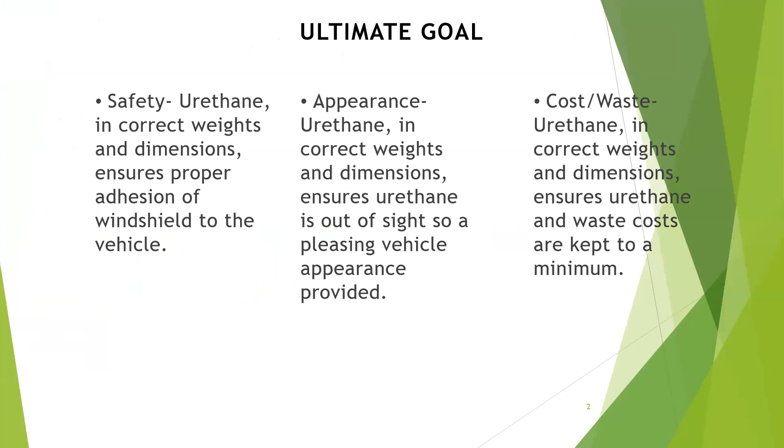For the first part, the ultimate goal has three aspects. First, using correct weights and dimensions to ensure proper adhesion of the windshield to the vehicle. Second, using correct weights and dimensions to ensure a pleasing vehicle appearance. Third, using correct weights and dimensions to ensure cost and waste are kept to a minimum.

The current situation is an increase in incidents reported by team members, and the persistent excessive use of adhesive is causing problems in Plant 2.

Over the past 7 month period, the current specifications for urethane weight are 0.9 to 1 kilogram per car for the Venza, and 0.7 to 0.8 kilogram for the Camry and Avalon.

The proper bead shape forms an isosceles triangle with nominal dimensions: 8 millimeters wide at the base and 12 millimeters in height.

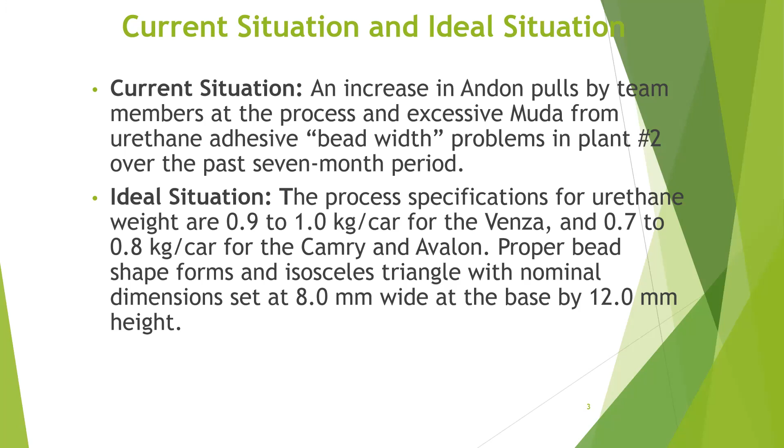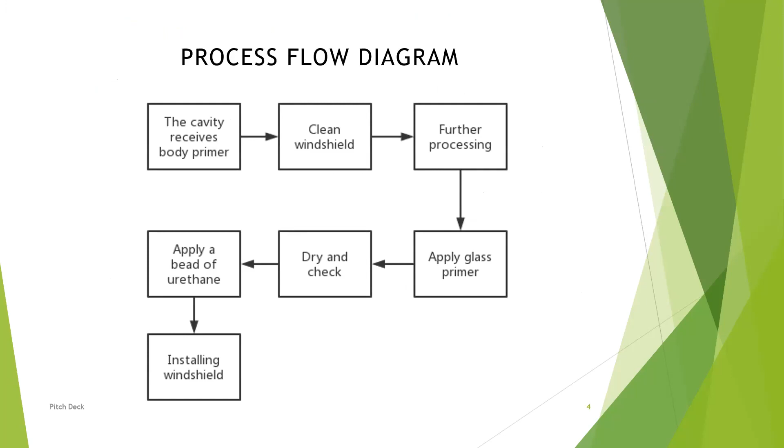Here is the process. First is the cavity with body primer, clean the windshield for further processing, apply glass primer, dry and check, and apply a bead of urethane.

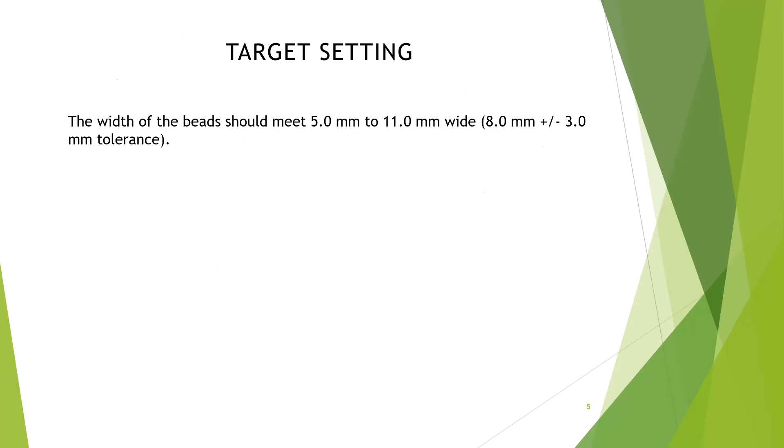Last is installing the windshield. The target setting is the width of the bead should meet 5 millimeters to 11 millimeters wide. So here is a fishbone diagram.

There are 4 root cause aspects. First is man: the root cause is the robot cleaning procedure is not clear, and new employees don't know to clean, incomplete training. For method, the root cause is too large a tip cleaning tool used, pump pressure too high, incorrect temperature, inadequate cure time.

For material, the root cause is incorrect viscosity, shelf life exceeded, excessive waste, and excessive use. For machine, the root cause is unstable pump pressure, pump wear, and unstable robot speed.

These 4 root causes combine to cause bead width changes together.

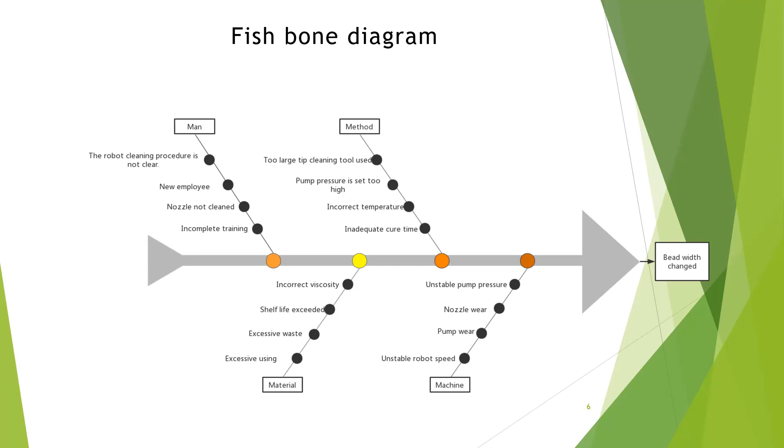Here is the 5 whys. The first question is why is the pump pressure unstable? It's because the dispense tip is too wide or clogged, and the viscosity of urethane is too low or too high.

Second question is why did the employee training fail to achieve the expected results? It's because the purpose of training is not clear and there are no strict training standards.

The third question is why is the temperature unstable? It's because the environment temperature changes and the cooling equipment fails.

Why is the speed of the robot unstable? It's because the robot cleaning procedure is not clear, and the robot speed is not adjusted.

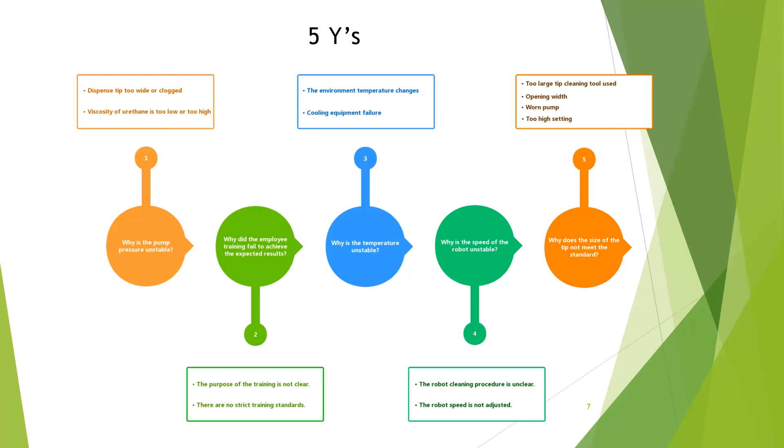Why does the size of the tip not meet the standard? It's because too large a tip cleaning tool is used and the opening widths are set too high.

Here is the affinity diagram. I organized it into 3 sections. The first section is training and employee.

We should provide professional training for employees with a training outline and practice, and training must have tests and produce staff operating guidelines. For the equipment section,

I think performing regular maintenance on the equipment is needed, and equipping it with temperature monitoring equipment and viscosity of urethane monitoring equipment.

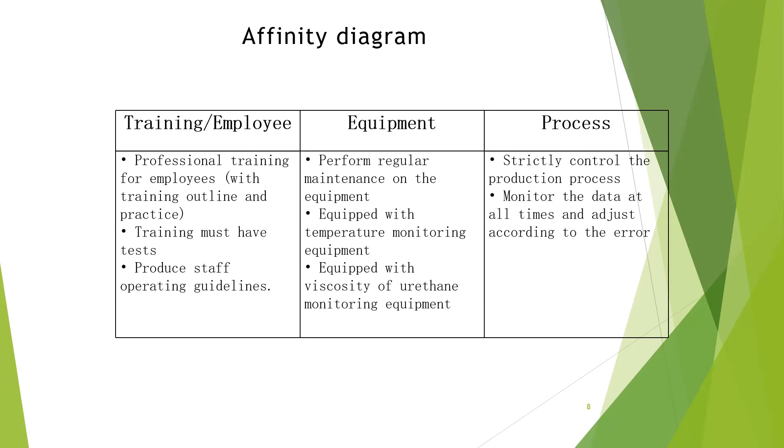For the process, I think we should strictly control the production process and monitor the data at all times, adjusting according to the error.

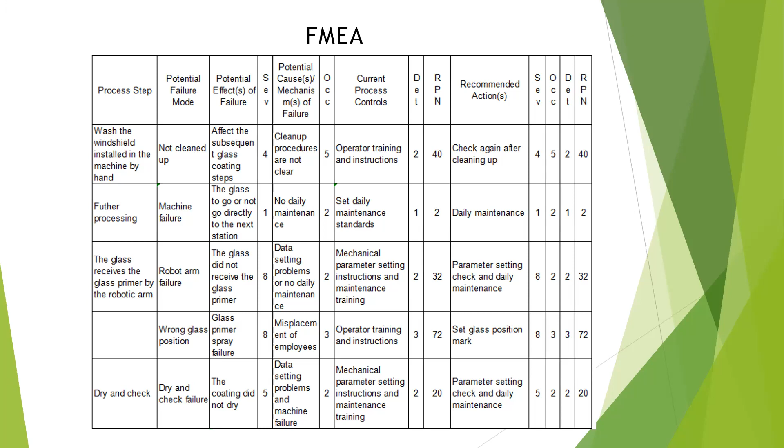Recommended actions are parameter setting checks and maintenance. The last two steps are glass receiving the bead of urethane by the robot arm.

It has two potential failure modes: the bead width is too wide or too narrow. The effect can be windshield replacement needed or cleaning to remove urethane.

The cause can be robot speed, dispense tip too wide or clogged, urethane viscosity, or pump pressure.

We can control it by operator training and instructions, mechanical parameter setting instructions, and maintenance training. We can also buy new equipment, like a new pump. The recommended actions are parameter setting check, daily maintenance, and new equipment.

For the robot arm failure, the effect can be that the glass didn't receive the bead of urethane. The cause can be data setting problems or no daily maintenance. The control method is mechanical parameter setting instructions and maintenance training. Recommended actions are parameter setting check and daily maintenance.

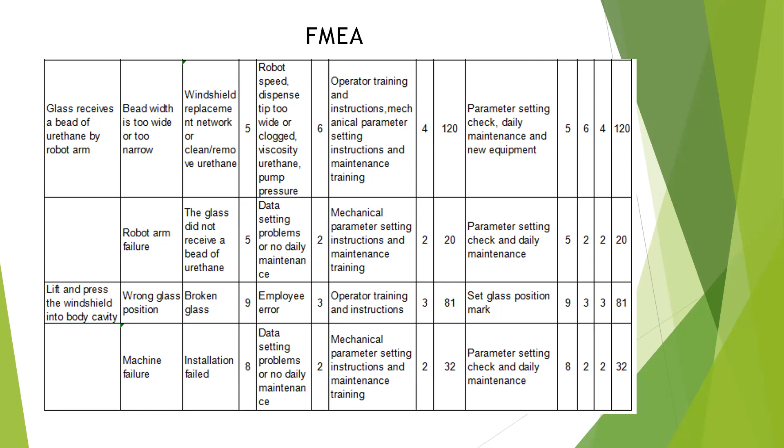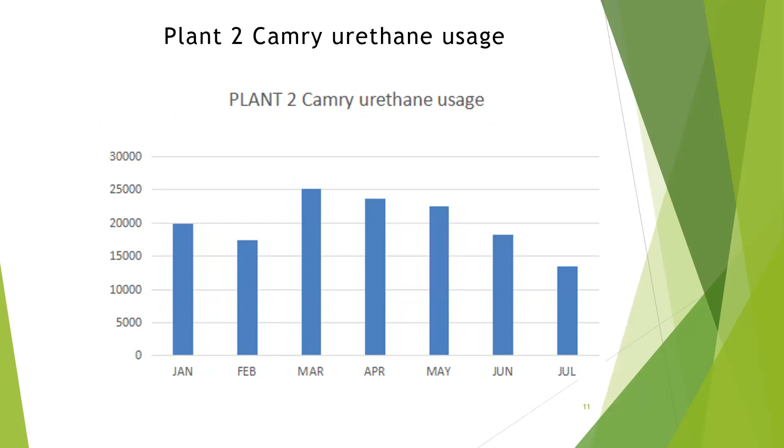So this is Plant 2 Camry urethane usage. We can see in March, the Camry urethane usage is highest. This is model production from different plants.

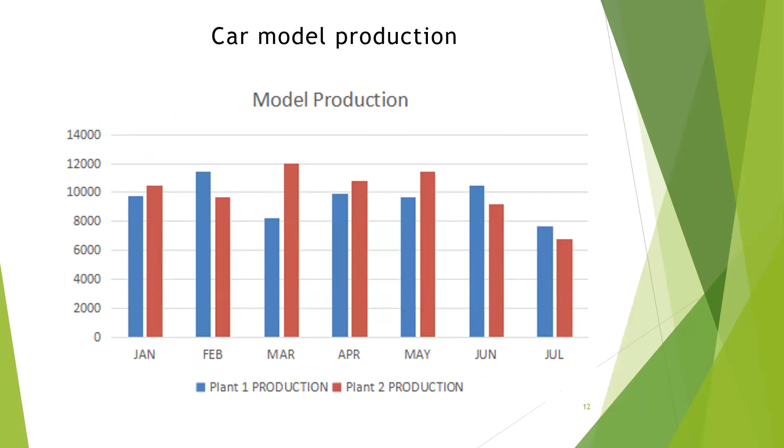The blue is plant 1, the red is plant 2. This is urethane adhesive usage. The blue is plant 1 Camry, orange is plant 1 Avalon, the gray is plant 2 Camry, and the yellow is plant 2 Venza.

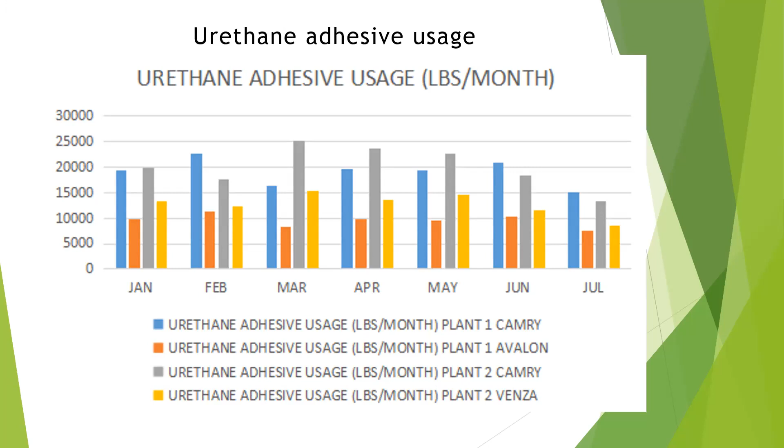This is the urethane adhesive solid waste. Blue is plant 1 Camry, orange is plant 1 Avalon, and the gray is plant 2 Camry. Yellow is plant 2 Venza. We can see on the map that plant 2 Camry has the highest waste, and in July, plant 1 Avalon had the lowest waste.

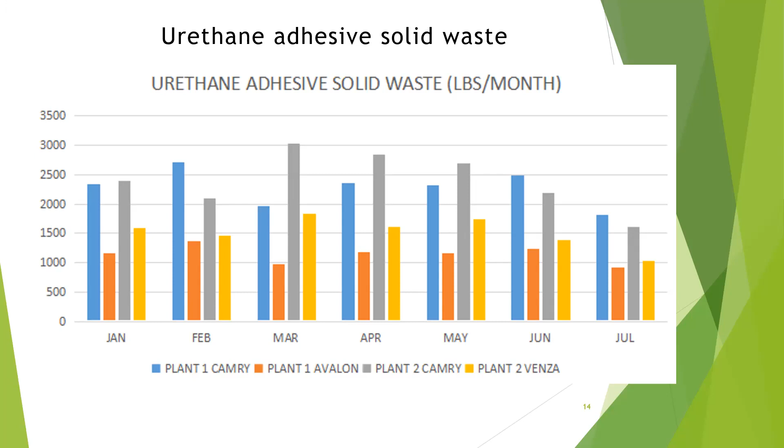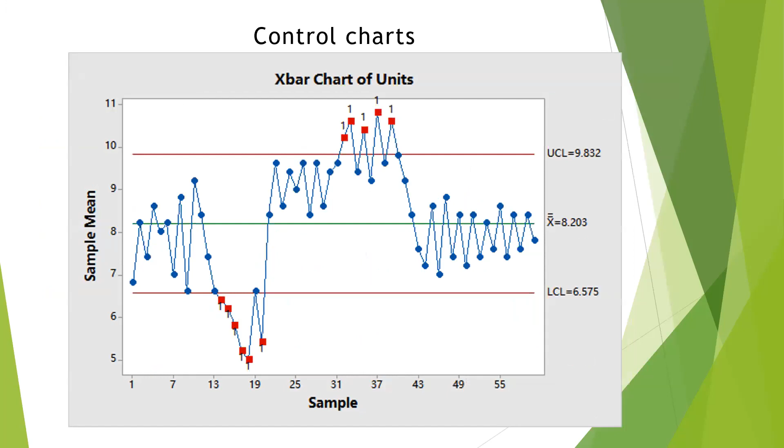Here are the control charts and the Xbar chart of units.

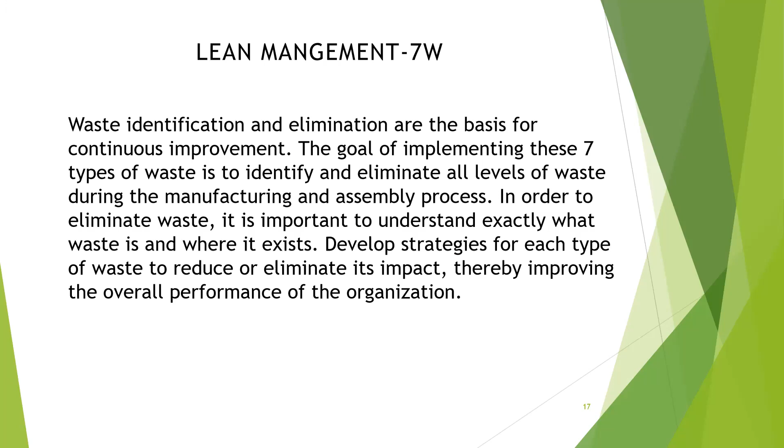For lean management, I discussed the 7 wastes and Kaizen. Identification and elimination of the 7 wastes are the basis of continuous improvement. The goal of implementing these 7 types of waste reduction is to identify and eliminate all levels of waste during the manufacturing and assembly process. In order to eliminate waste, it is important to understand exactly what waste is and where it exists, and to develop strategies for each type of waste to reduce or eliminate its impact, thereby improving the overall performance of the organization.

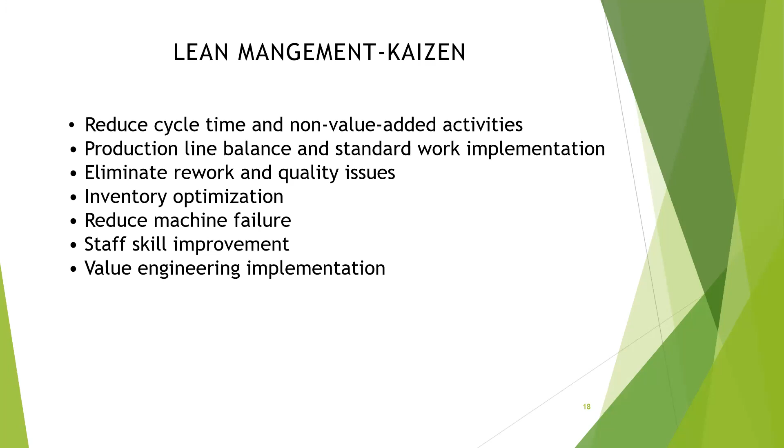So, how does the automobile industry apply Kaizen? The company applies Kaizen methodologies to reduce cycle time and non-value added activities, production line balance and standard work implementation, eliminate rework and quality issues, inventory optimization, and reduce machine failure, staff skill improvement, and value engineering implementation.

This is countermeasures and conclusions. In January, the process is in control. In February, the temperature is below freezing. The countermeasures are heating device maintenance, setting the temperature to 75 degrees, and assigning a new employee to the urethane robot area.

The countermeasure is incomplete robot cleaning procedure training. The urethane bead application speed was recorded to be 340 millimeters per second on average, and the pump pressure was recorded running at 7.5 on average, and unmatched.

The temperature rose back to 75 degrees, and the temperature on plant 2 rose to 83 degrees. The pump pressure is reduced to 4.5, and the robot speed increased to 365.

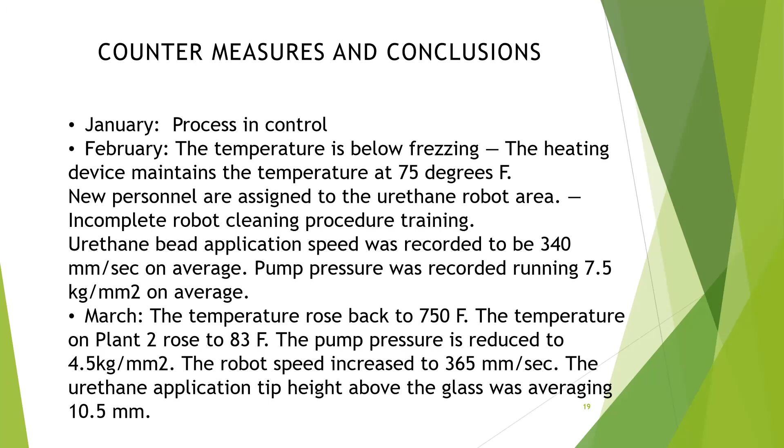The urethane application tip height above the glass was averaging 10.5. In April, the temperature rose to 100 degrees, and the temperature of plant 2 rose to 92 degrees due to a failure of cooling equipment.

The pump pressure rises to 4.9, and the robot speed drops to 360 millimeters per second. The urethane application tip height above the glass was averaging 10.2 millimeters.

In May and June, we completed the design of the dispensing head, tightening the control of the tip opening, and installed new heating and cooling equipment to control the temperature. We increased the height of the tip above the glass check piece, installed the measuring device, and also installed a robot TV to control the speed of the robot.

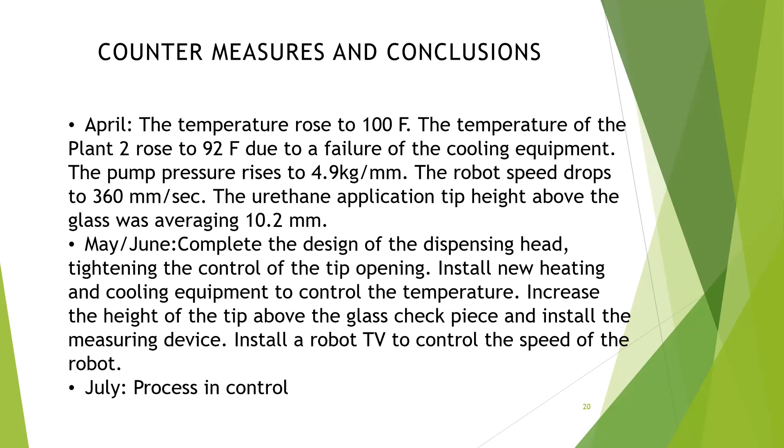And in July, every process is in control.

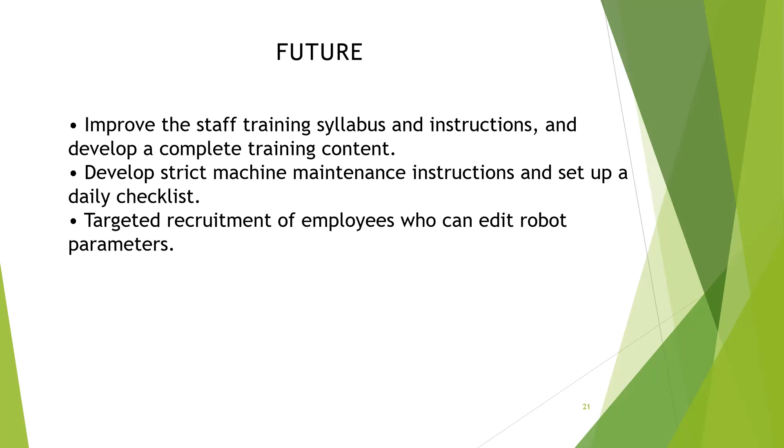So in the future, I think I will improve the staff training syllabus and instructions and develop complete training content. I will also develop strict machine maintenance instructions and set up a daily checklist for machine errors. I will also target employment of employees who can edit robot parameters. So this is my presentation, and thank you.